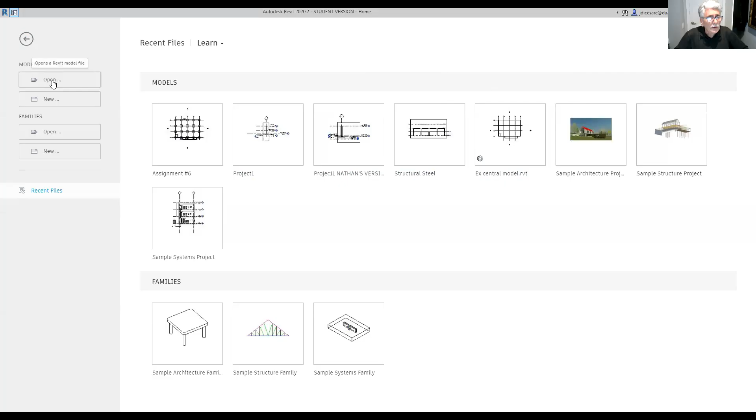Structural, okay. I'm gonna very quickly, okay, so let me just go and put this here.

Units, change this to. There we go. Okay, an eighth of an inch. That's good, that's good, that's good.

And we were at, excuse me, we're at the north elevation. And this is where we're at. And of course, we had changed this to 102. And we had changed this to 91 feet, was it 91 feet 4 inches?

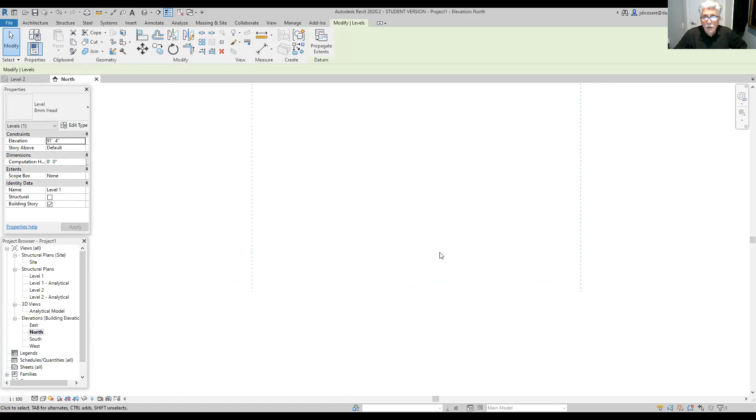I think we're pretty well back where we started. Is that okay with everybody? Yep. Oh, here, I made a mistake here. I'm gonna just change this back to 102.

Sorry, sir, could you do one more time with the grid function so I can review it? I'm sorry, can you repeat that? Could you do one more time with the grid function? The grid or the level? The grid, we haven't done anything with the grid. Are you talking about the working grid? Yeah. I'll come back to that, okay? I'll come back to that, but right now, when we go back to a plan view, I'll show you how to do the grid again, okay?

But right now I just wanna, now guys, like I said, remember what we talked about here. Excuse me, sir, pardon? Do we need to change the scale at the bottom? Well, oh yeah, didn't I change it? But I think we need to change for like every.

Oh yeah, for every view, I should have explained this, okay? For every view, okay? Now if all of a sudden you're gonna take this view and drag it onto your sheet and make a drawing with it, you understand? If you know at what scale you're gonna make that view on your paper, then you adjust the scale of this view right now, so you don't accidentally forget to change the scale of your view, you understand?

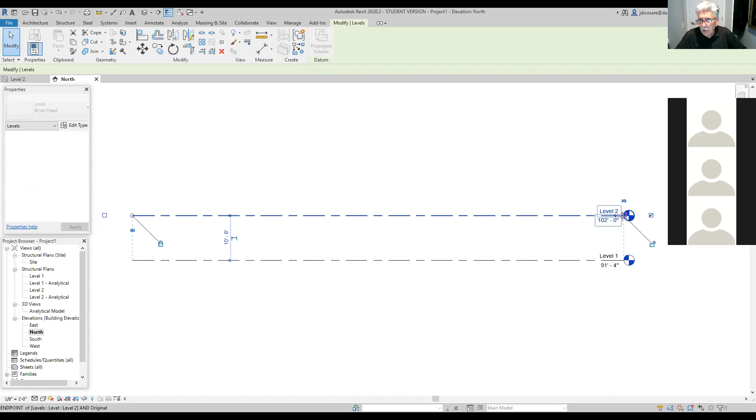I want to just move the top one without moving the bottom one, I could unlock it, and then it will only move the top one. So that's what the lock does. So anything that's lined up will be locked together, and therefore you can move them simultaneously all together. If ever you want to move only one thing, you simply unlock it and you can move that one by itself, okay?

Now, because these things are no longer aligned, you don't see the lock anymore. If I want to bring this back and line it up, now these two become locked again. I can do the same thing on this side. If I want these two to work simultaneously, I move this one over and they become locked again. That's what the locks are. In other words, it locks any element that is interconnected or interrelated.

If you ever want to stagger this, you see this little break sign. If you click on that, it's going to stagger the symbol for you, and then you can move it wherever you want, up or over. So sometimes when you have a whole bunch of them, you want to get them out of the way. That's what that little symbol is about, it's going to stagger them. And if you don't want them staggered, you can simply put them back straight.

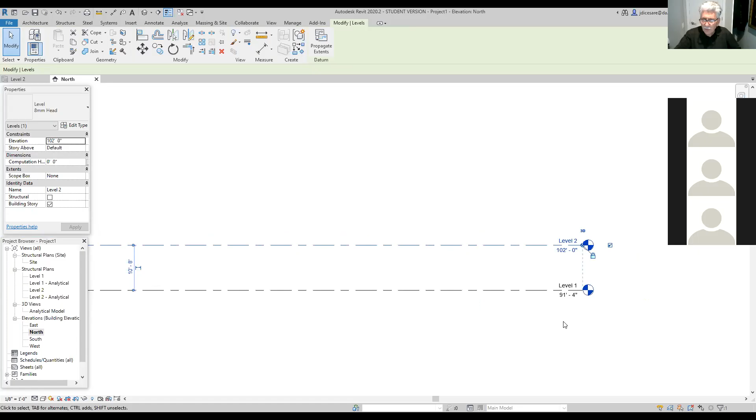Those are a number of things you can do with these. This is useful if things are getting really clustered and you want to move them over, because they tend to overlap one on top of the other, so you can actually move them around.

Okay, so now I've got two levels. Now what I'd like to do is create another level. I want to create, for example, the lowest level of the foundations. If I look at my drawing, the lowest level of foundations would be at 88.33, in other words, 3 feet below level. Before I move on, let me explain something before we create the level.

The other thing I like to do, you notice if you look at the view browser, you have level one analytical, which is for structural analysis. We're never going to touch that. Level two analytical is also for structural analysis. Now I don't want to have to remember that level 2 is 102, level 1 is 91 feet 4 inches.

So what I can do is click on this and change the name. Here I'm going to call it level 102 feet, so I know. Once I click on this, the program asks, would you like to rename the corresponding views? In other words, do you want the name changed in the view browser. Of course you do, so you say yes. Now if you look at the view browser, that's no longer level 2, now it's level 102. So when I'm looking at the view browser and want to go to that level, I know exactly which one to pick to get to level 102.

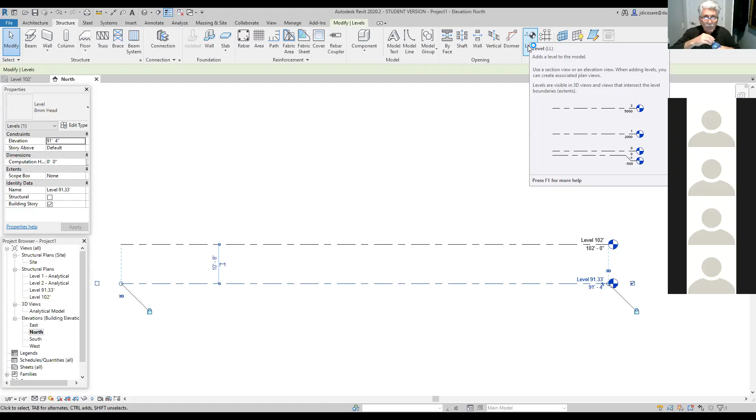Now I'm going to click on that level, and hover over the end point. I'm going to drag down, and I know that level is 3 feet below. So I can either drag down to 3 feet on the screen like this, or at one point I can simply type 3, push enter, and it automatically puts it at 3 feet. So it's up to you how you want to do it.

Then I'm going to drag over to the right and put it there. That's going to represent the top of the foundation of the lowest level. Now I'm going to press escape to get out of the command, pressing it twice.

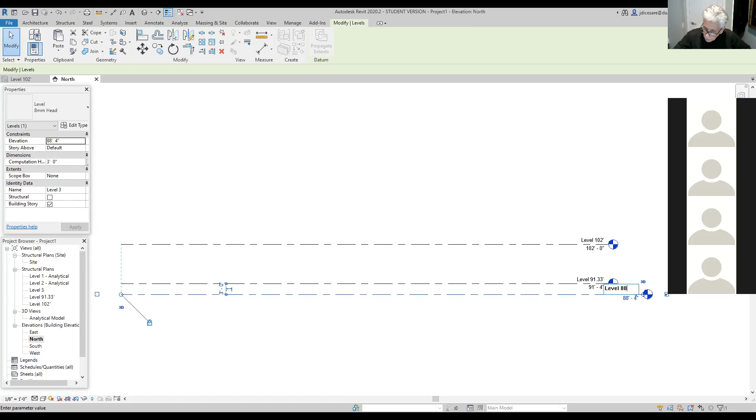I'm going to click on this and rename it. I'll call it level 88.33, and I wanted the name to also change in the view browser. So now I've got 88.33, 91.33, and 102. Now I'm going to create just 2 more levels for now, and I think that will be sufficient for the whole project.

I'd like to sometimes create a level at the deepest point of my model, the underside of the footing. The deepest underside of the footing is under footing F5 at the intersection of column 1D. If I look at that, it's at level 86 feet 10 inches. I've already done the math for you.

So now I'm going to go back to the structures tab and create another level. I'm going to go down from footing F5 by 1 foot 6 inches - 1.5, enter - and see, that's 86 feet 10 inches, exactly where I want to be. I'm going to place it here.

Now what I'm going to do is move it a little bit, just to clear it up so it doesn't interfere with that one. Now I'm going to rename this to level 86.10 inches, 0.83.

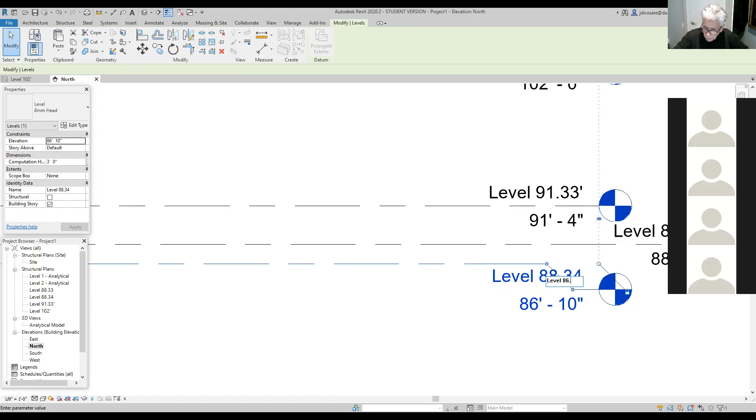Yes, I want it to correspond. So that's going to be the lowest I'm going to go on my level, the lowest where the concrete is going to be.

Now, we don't have this right now, but on the last project we'll be doing, we're going to build a steel structure on top of the floor, and we're going to put that at level 114, the floor. So we can either do it now or wait until the last assignment, but we might as well do it now so we have all the levels created.

So I'm going to go back to structures and create another level. I'm going to drag up, and that's going to be 12 feet above the ground floor, so I can put the value 12. Press enter, so it automatically snaps to 12, and that should be level 114. I'm going to change the name to level 114 feet.

So now I've basically created most of the levels I'll need to make my model. This is where I'm going to start giving the information in terms of how high each element is going to be in my model. Does anybody have any questions so far?

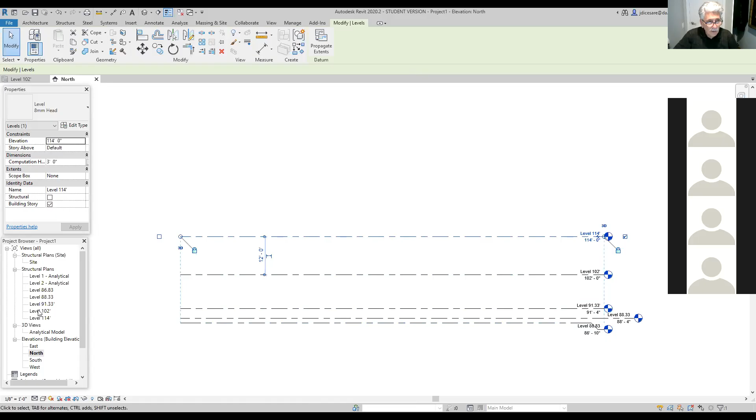Now what I'm going to do is go back to a plan view, and I'm going to look at the view of level 102, because I'm not going to be working on 114 right now. So if I go to my project browser and double click on level 102, it brings me back to the plan view. Everybody sees that? So the project browser will instantly bring you to the views that you want to go to.

Thank you. Now, Jimmy, you were talking to me about the working grid, right? Yes, sir. So first of all, are you on the structures tab? Yep. You are on the structures tab. If you go all the way to the right, you see where it says set? Right next to it, there's something called show. Okay, I found it. It's in a smaller icon.

Well, Jimmy, that's why - now you're going to have to put up with the fact that we don't have the same version, you understand? And this is what pops up. So leave it on for now, okay?

So guys, everybody turn on your grid. This is the working grid, it's got nothing to do with... Now that we've got our levels, so that we can place things and define the height of things, what we're going to be doing is making the grid of our plan view so that we can start placing the horizontal elements. So we're going to start creating a grid. Does everybody have their grid on, okay?

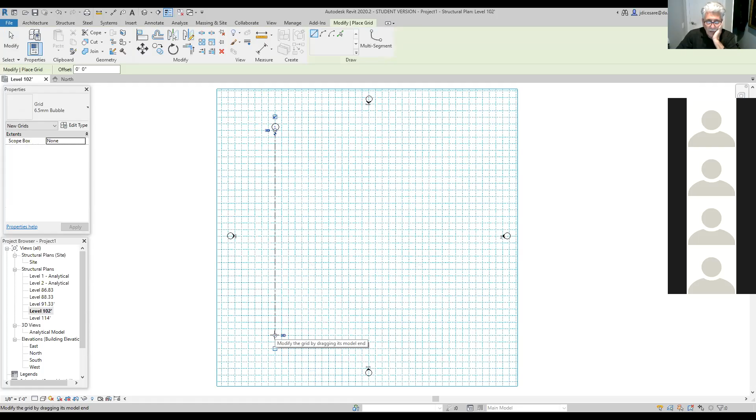Now I want to create a second grid. So what I'm going to do is hover over the bottom of the first grid and drag it over, and you'll notice that I'm starting to have some dimensions showing. Now, because my grid is at 4 feet, I cannot snap to 25 feet, because the next grid line is at 25 feet. So I'm simply going to put in the value of 25. Now the program snapped to 25 feet away.

I go up, and of course, I line myself up with the first one. I see that I'm lined up, I'm vertical, 90 degrees, click. Now, the nice thing about Revit versus AutoCAD, you'll notice that becomes grid number 2, so I don't have to go change that, okay?

Now, if I go back, I hover over the bottom and drag over again, now another 25 feet, so I will be putting 25... oops.

25, enter. I drag up, line myself up, and I've got grid number 3.

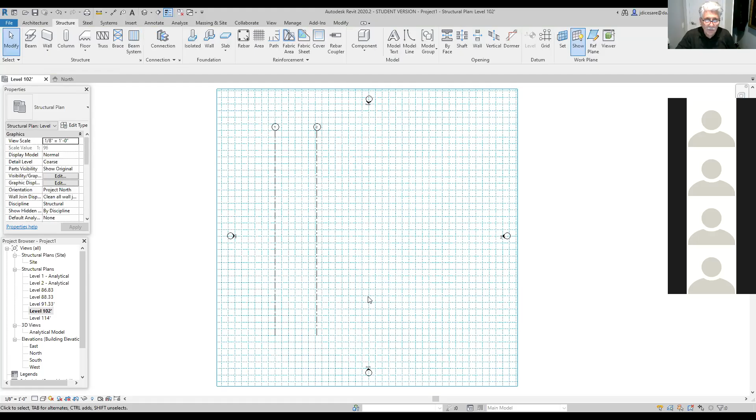Oh, sorry, I made a mistake. Grid number 2 was at 24 feet, right? So let me just change that to 24. No, it's actually 25, sir. No, between grid 1 and grid 2 is 24 feet. Oh yeah, right, I'm sorry, I made a mistake. So 24, enter. Now I'm at 24, okay? That's what I like, I'm showing you how fast it is to correct a mistake. Then I'm gonna go back to structures now, so I apologize about that.

Go back to grid, go back to that command. Now this one's at 25. I'm gonna put 25, enter, go up, line it up so everything's nicely lined up, click, go back down, go over. I'm gonna let you guys have a chance to do this.

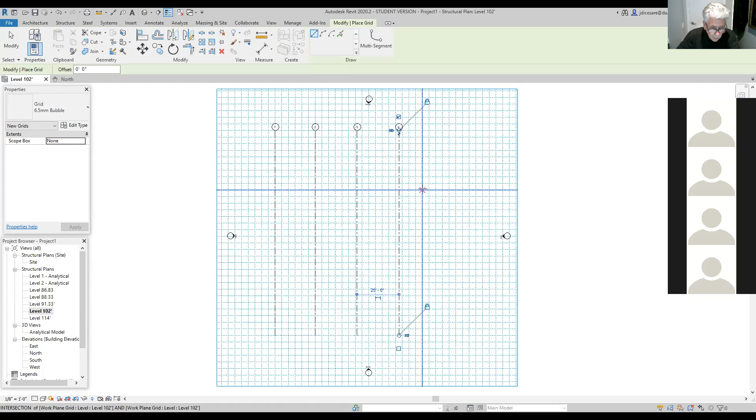25, again, go up. And of course one last one, which would be at 24. And of course, go back up.

Okay, so far so good. I'm gonna give you guys a chance to do this, so take your time. Like I said, I made a mistake right at the offset, but I was able to correct it right away, okay? So you should have between 1 and 2 at 24 feet, 2 and 3 at 25 feet, 3 and 4 at 25, and then 24 feet. Give me some indication if you guys need more time to do this, because remember, the grid that you're creating is very, very important. Why? Because everything is going to be referenced with respect to the grid.

Is everybody okay with this, or do you want me to do it over?

Sir, yes, I don't know why but my grid function doesn't work. Your what? The grid? Yeah, the grid. Are you talking about the grid that we're trying to create? Yeah. In other words, are you on the structures tab here? Yes. Okay, and you have the icon here, grid. Yep. And when you click on it, do you get where you can start your grid from? I didn't see my grid. What do you mean you don't see the grid? You're talking about the working plane grid or your grid? The working plane grid. Well, that's because you zoomed in too closely, you have to zoom out.

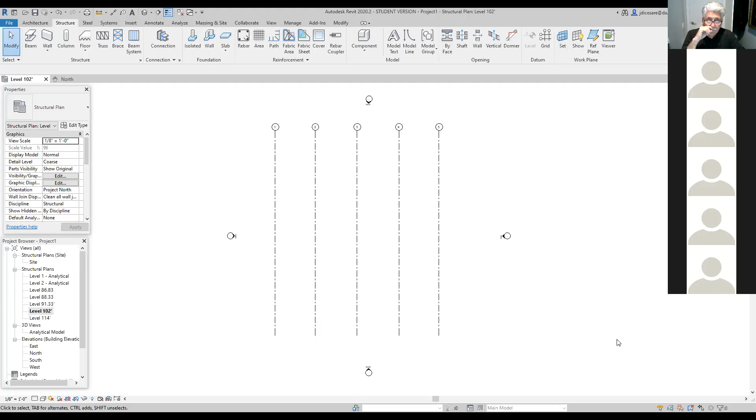Now, Jimmy, let us know when you're finished so that we can continue, okay? Okay, you're good?

Yeah, I'm setting the third line. The fifth one? No, the third one. Okay, so keep going. You only have to do the third one, then do the fourth one, then do the fifth one.

Okay, now guys, like I said, you notice I made a mistake at the very beginning. I put 25 feet between 1 and 2. What I like to do is make sure that I'm on the right track, everything is where I want it.

If you look at the top ribbon, the top menu, this is what they call the quick access menu. You have measure between references. So if I click on that, I could measure between that line and that line. I have 24 feet. I can measure between this line and this line, so that's good. I have 25 feet, so I'm just double checking to make sure I didn't accidentally put in the wrong value. And now, ultimately, if I want to check from this line to this line, I should have 98 feet. Everything is good, so I'm happy with the distances, okay?

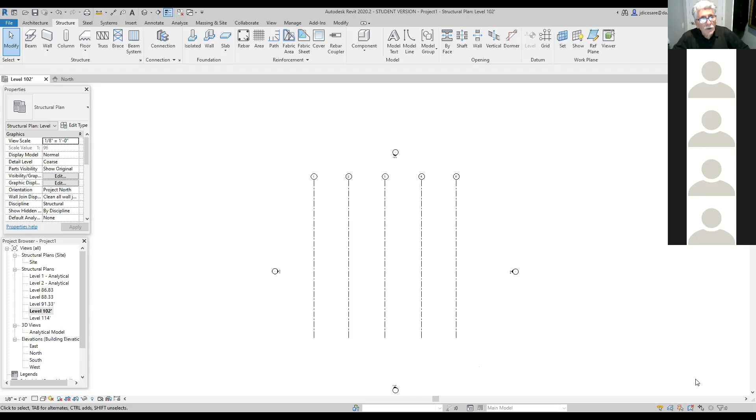No? Okay, so now again, make sure you're on the Structures tab. Make sure you click on Grid. Now pick a point wherever you want, okay? Just leave yourself some room - you can move these anytime, but if you look at your drawing, you're going to have to make room to put that little bubble and your dimension. So be reasonable where you want to do it, but you can always move this at any time. You pick a point, drag it over, make sure you're at 90 degrees. Okay, I'm horizontal. There you go.

Now, before you - what I want to explain, guys, if ever you want to get out of a command with Revit, you have to hit the escape button twice. Escape gets you out of the command, escape gets you partially out of the command.

Now I want people to zoom in here, okay? Now you notice that it put grid line number 6. You don't want a 6 there, you want an A. So you click on the 6 and change that to an A - in other words, double click on the 6 and change it to an A. Click outside the box. Now that 6 has become an A.

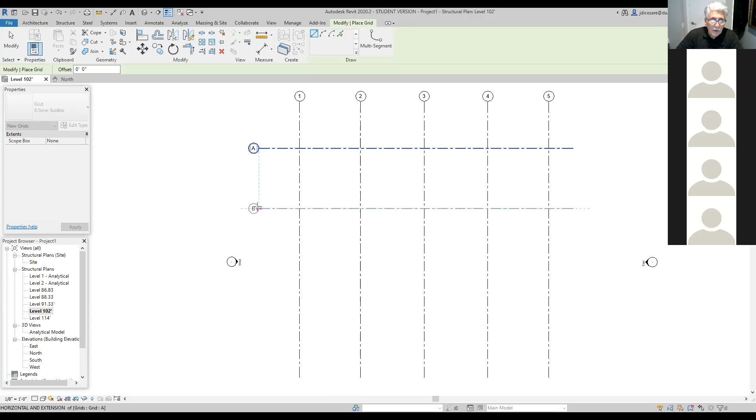Now I'm going to zoom out again, zoom out to about here, and move up this way. Now what's nice about Revit is that once I've changed that to an A and I'm ready to create my next grid line, I go to grid, hover over this point, go down to 24 feet, move over, and look what Revit does automatically - it changes the grid line to a B. Isn't that nice? Then, if I go back here, hover over this point, drag down another 24 feet, and drag over, it becomes a C. So that's what's nice about changing that right away - this way I won't have to go back and edit the 6, 7, 8, 9 to A, B, C, and D.

And last but not least, one more time, drag down - like I like to put the value so I don't have to worry about being precise. 24, enter, and now I've got my D, okay? So now I've created my grid, and of course I should go back and check.

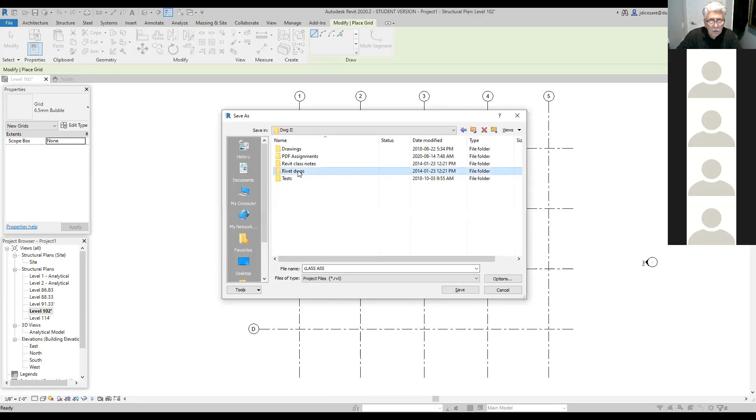Okay, so I saved this, so that if we ever come back, I'll be able to pick up from where we left off. Like I said, before I move on, I always like to double check to make sure I haven't made a mistake.

Now I like to go back and check my dimensions. So I'm going to check from here to here. I have 72 feet, so far so good. And of course I should have 24 feet in between. So there's 24, everything checks out.

So guys, do yourself that favor, always double check to make sure everything's correct, because the computer uses all this information to do its calculations. If something is off, you can ask yourself, why isn't it working? Well, because the reference the computer is using is not exactly what you think it is. So always double check that.

Okay, now there's a few things I want to talk about with grid lines. Just like we did with the working grid, I want everybody to click on and highlight grid line number 1. Now look at the properties palette. Right now this is a grid with a 6.5 millimeter bubble.

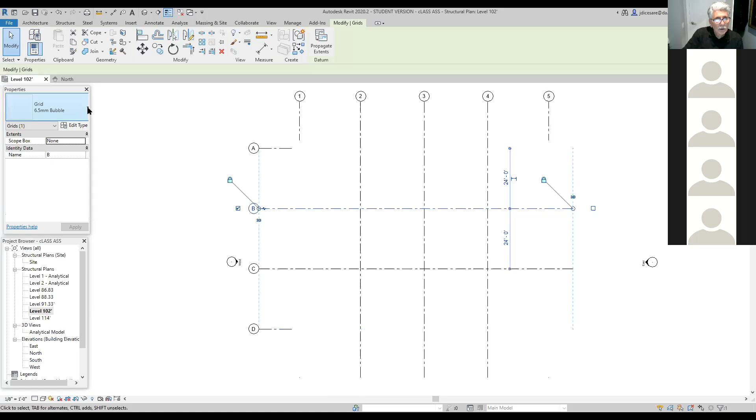Now, underneath here, you don't see it, but there's a little triangle that you can fly out the drop-down menu. So when you drop down the menu, we select bubble gap. You start with bubble with a gap, you understand?

Now these are your drag points here, see the blue one? So I'm going to drag it, and it even tracks it for me if I'm in line. If I want to keep it in line with that one, and if I want to get rid of the line completely... I'm going to leave that there for now. So if I leave that point there and press OK, enter, look, it created a gap between those two drag points. That's what it does.

Now, since I don't want to see it on this side, I simply drag it into that point, and it's going to end up like you see here. That's the point of the grid line right there, and there's one right there, but this is so small that when you're plotting, you won't even see it. So is that okay? Do you feel comfortable now with it? Okay, now I understand.

Okay, so now I'm going to undo this because I don't want that to be there. So now let's go back and everybody hit north elevation. You see, there's your grids. Now, of course, because I created a gap here, it's also a gap here, but you have your grid lines shown in the elevation.

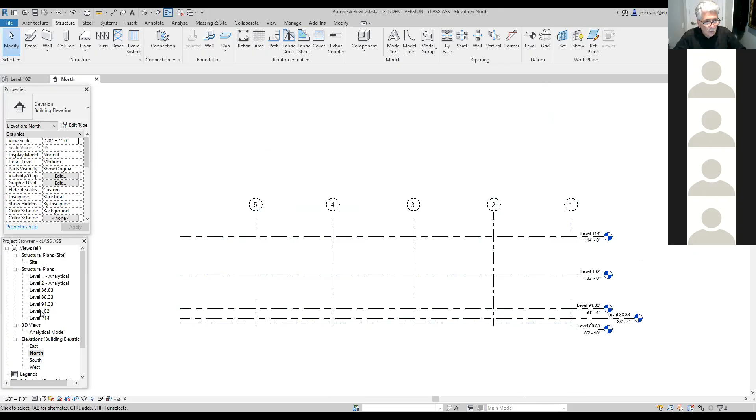So go back to level 102. Now we've basically set up our grid and we're ready to start modeling. So what we're going to do is start putting in the wall. In other words, we're going to start by putting the general wall in and then we'll work out the other smaller walls. So basically, we want to put in the overall wall here.

So guys, with Revit, remember, information is what you need to put in the wall, and if you don't put in the correct information, you will never get the wall put in correctly. So what you need to know is: the wall starts at what level? It goes down to what level? How do you want the wall to be placed? And so on. What type of wall do you want placed?

So let's just start. First of all, the category we're working with is walls, so everybody's under the category walls here, right? So open up wall, and of course we're going to be putting in a structural wall. Right now these are all the structural wall families, the type of walls that I have already built into Revit. Now I'm going to use a concrete foundation wall here.

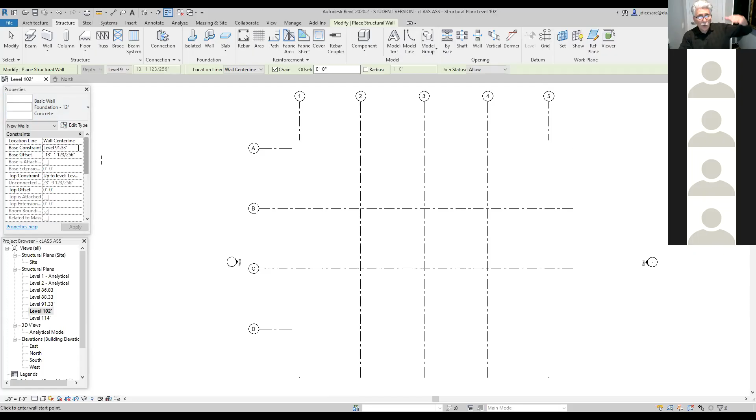Now, how far down do I want the wall to go? Well, I know I want that wall to go to level 91 feet 4 inches. So I want the bottom constraint to go down to 91.33. So now I'm telling the program, take this level and go down to this level. That's the information it needs.

As far as offset goes, I don't have to offset from these levels. That's exactly where I want to go. Therefore, this should be 0.

So far, what I've done is told the program where I'm placing this vertically in my model. I'm placing the top at level 102, and the bottom at level 91.33. That's where I want it to be, and that's the height of my wall. So that's what the program's going to use to do its calculations.

Now, how do I want to place a wall? There's a number of ways that the wall can be placed. And here is the wall location. You can do it from here.

So you can place it with the wall center line. In other words, if you want the wall to be centered where you're placing it, half on one side, half on the other side, that's center line. Then there's finish face exterior, finish face interior. Then there's core face exterior, core face, because some walls are made up of two or more compositions, so it gives you that option.

Now, if you look at the drawing, you notice that the inside face of your wall corresponds to your grid. So you want the program to place the wall with the finished interior face. So what you would pick is finished face interior. Now, don't worry if you made a mistake, I'll show you how to correct that. So now you're almost ready. Location is finished face interior.

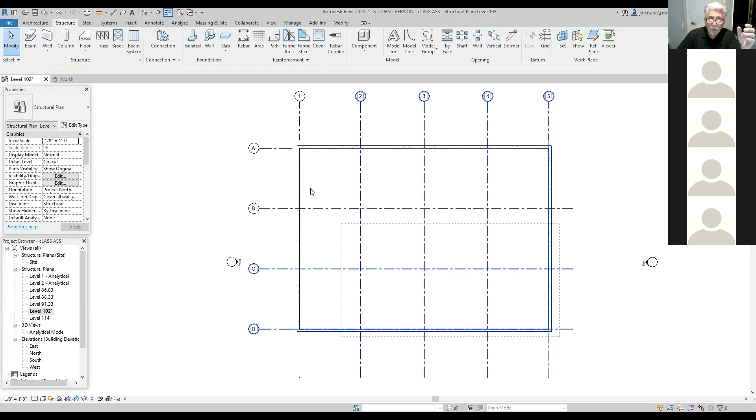And then if I want, I can also pick by crossing. Crossing is from right to left. So I'll draw exactly the same rectangle, but the difference is that with crossing, everything gets picked. So you do the same thing with Revit. You can, and then if you want to pick one or two elements, you pick one element, you hold down the control button, you pick another element.

You hold down the control button, and you can keep adding by holding down the control key. Then if all of a sudden you want to remove one of them because you picked it by accident, you hold down the shift key and go back, and the shift key will remove what you've picked. So control adds, shift removes. Can you remember that?

And like I said, if you want to pick with a window, you draw a window, whatever's in the window, it picks it. If you want to draw a crossing, whatever's in the crossing, it picks it. So crossing means anything that crosses that rectangle will get picked. Window means only anything completely within the window will get picked. That's how AutoCAD works also, since they're both developed by the same company, Autodesk, and that's why they work that way.

Okay Jimmy, to go back, I'm going to pick this and delete it. So I'm going to go back to wall, structural wall, 12 inches. There's my base constraint 91. That's okay, finish face, so all my properties stay the same because it keeps the last values by default in its memory. Then Jimmy, you come up here, you see where your drawing tools are?

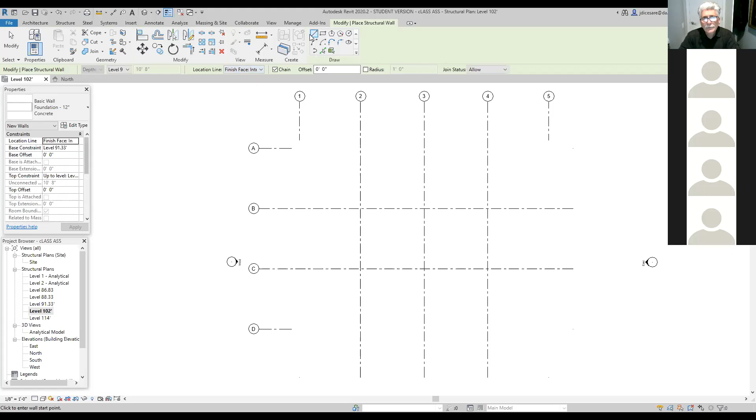Pick the one that has a rectangle. Then go find the intersection of your two axes. You see there? Pick a point, then drag out, and go to the other corner and find the intersection of the other two axes. Once you pick the two points, Revit draws the wall for you. You press escape and you're done.

Now guys, what I'm going to do at this point is, what's nice about Revit, you see at the top here the little house? Everybody sees that, where I'm pointing at? Click on that button, and you can automatically see your model in 3D. There's your model in 3D. Of course, there's not much here because we just started to create it, but that's your model in 3D.

Now, I gotta get rid of this here, sorry, I gotta move this over, okay? Now here you have your cube that you can rotate your model on a particular view. So if you click on the cube here, it turns it around for you. You can start seeing different views of it, okay? You want to see it at the bottom, you want to see it at the top. So that's the cube, that's the view cube.

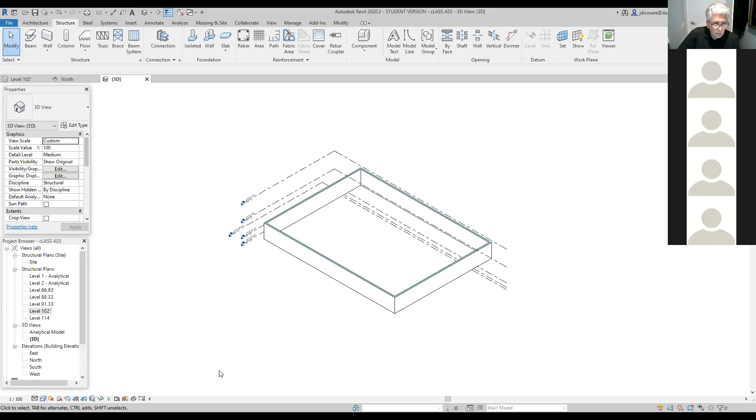Now, this is right now showing to you in wireframe. If you want to change that, go down to the bottom here where it says visual style, okay? You click on that and you can have it shaded. You can see it shaded. If you want to have it realistic, you can have it realistic. If you want to see it as consistent colors, you can have it like that. And if you want to see it as hidden lines, you can have it like that. So that's the number of choices you have. It's up to you how you like to see your model, you can have it as shaded.

Now let me just put this back here. I have a question. Yes, you may. I don't know why, but my wall says that it's 73 in height when it should be 74. And I looked at the spacing in between my A, B, C, D, and it's 24 feet, so I don't know why I wrote it wrong. Your wall is 73 instead of 74? Yeah.

Okay Emmanuel, what we're gonna do is, well, you're gonna have to share your screen with me and I have to look at it, you understand? But you're telling me, okay, so let me go back to elevation 102, okay? Oh, one last thing, okay?

If ever, it's up to you guys, if you ever want to see your 3D and all your other views at the same time, like close this one here, you don't want to see the north elevation, okay? If you ever want to see these all at the same time, make sure up here you only have these two views open. If you go to view, and here you have tile views, you can see them both simultaneously at the same time, see?

You can tile both views and have as many tiles as you want, the more views. That's how you can view everything at the same time. I don't like to work that way, but some people do, so this way they automatically see what's happening in 3D. And of course, if you don't want to see it in tile view, you just click back.

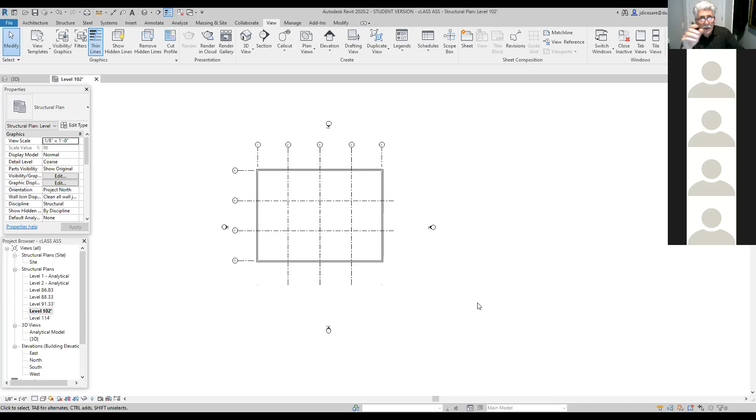But now let's just, Emmanuel, you're telling me that when you're coming here and measuring from this endpoint to that endpoint, you don't have 74 feet. Is that it? Yeah, I don't know where I went wrong.

So basically, well, it's finish face in, right, for the wall? Yeah, but okay, now let me show you something. Does the inside finish face here correspond to your axis on all four sides?

Hold on, I deleted my entire wall, so I'm gonna just... Oh, you shouldn't have done that, I could have shown you how to modify it. Okay, I'm sorry, I was just like, okay. I'm glad you did, it's good practice. Don't get me wrong.

Now, guys, let's say you had automatically picked exterior wall, I'm going to show you something. Of course, what Revit would have done, it would have done the exterior wall along here and put everything on the inside. Now, the simple way of correcting it, if I click on the wall, you see these little arrows here? These arrows will flip the wall. So if I click here, that wall is going to go from inside to the other side. So if you accidentally did it the other way, you can just flip the walls over.

So therefore, you just flip here, and now it goes back to where it is. So if you had accidentally forgotten about that property in the properties palette, and you already drew it, well, you just flip the walls, okay? And each wall has that feature, so you can flip the walls anytime.

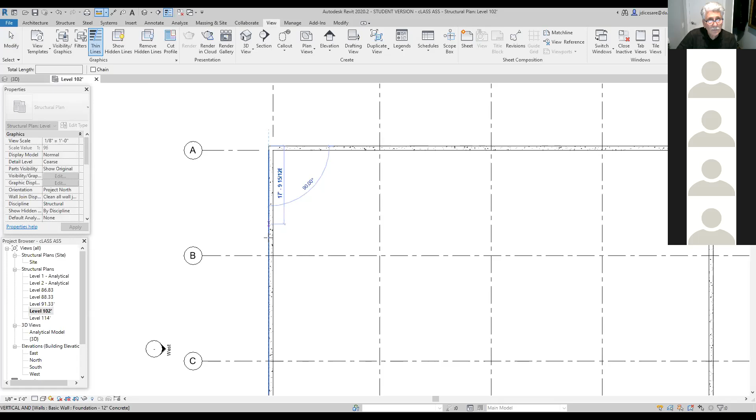So now I see 101. Do you have 101? No, if I do dimension from this endpoint - oh, you mean this way? Yeah, well that one I have 101 and the other one I have 74. I have exactly 100 feet. Okay, so I must have messed up somewhere.

Now look, Emmanuel, just check to make sure that the spacing of your grid lines are right - in other words, 24, 25, 25, 24. That's the first thing you should check. Okay, yeah, I messed up somewhere, the first one I put 25 instead of 24. Which one? The one in between 1 and 2. Okay, so that's where you put 25. It was my initial mistake, and I forgot to tell you to correct it, okay?

Yeah, so basically my outside wall, like on the left hand side, is off by 1.

Do I have to redo the entire thing or can I just move it? Well, there's a number of things I could show you to do, but right now I think the best thing to do is fix your grid, because that's going to be affecting everything else you're going to be doing with your model.

So in other words, right now you have 25 feet here, 25 feet here, and 24 feet here. Is that what you're saying? Yeah, so then I just changed the measurement.

No, do this, listen to me. Right now you're telling me you got 25 between this one and this one? Then 25 here, 25 here, 25 here, but 24 on the last one. So in other words, what you want to do is shift everything over by a foot.

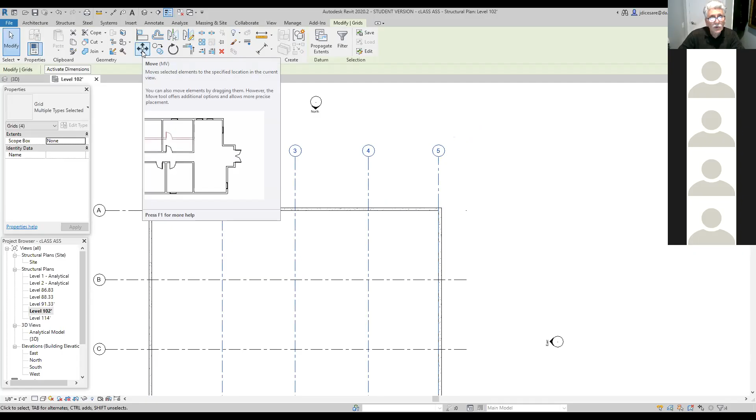Then you see here where I'm pointing, that's the move command, just like in AutoCAD. So say move, okay? Just pick a point anywhere, pick here, anywhere, okay? Pick that one, show the direction, and just put 1 foot, enter.

Oh, I shouldn't have done it to mine, but that's okay. Don't worry, I know how to correct myself very quickly. Yeah, so I did that, but then the exterior wall on the right side is off. But don't worry, now you can redraw your wall very quickly, because the grid is correct. Understand? Yeah, I'm just going to delete it.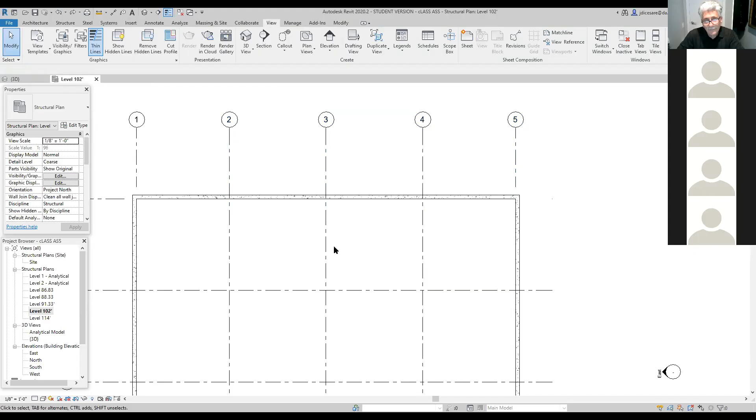Because everything in your properties palette should not have changed. It keeps everything you put in there for the last type you modeled. Understand? Yeah, let me make sure everything's good. Now, you see how fast I'm going to correct mine? I'm just going to undo. Yeah, it's a bit faster than me.

Okay, so that's where your problem was. That's why it's very important, like I said, the first thing I do is when I put my grid, I religiously check the dimension between each grid line, the overall dimension, because everything is going to get referenced with respect to this grid. There, that's very good.

It's all good now. Okay, so now, did you go see your wall in 3D? Does it look good? I didn't. Anyway, we'll be going back and forth to 3D, don't worry about it.

Okay, so guys, was that nice? Easy to do? Is everybody okay with that? Who hasn't been able to put in the wall correctly? Don't be shy, guys, now's the time to say it. Me, sir, you weren't able to put in the wall.

Well, it says the wall highlighted is overlap. You have 2 walls that you drew accidentally? I don't know. So delete everything and start over. Because you might have drawn it twice, and all of a sudden you're overlapping two walls in your model that you can't see. You understand?

So delete, like, do this, Jimmy. Make a window, start from here. Make a window like this, okay? Make sure you make a window around the whole thing except your grid, and then hit delete up here, or hit the delete button. It's going to erase everything, so if you accidentally put two walls, it's going to erase both of them. And then once you've done that, go back and redraw your wall.

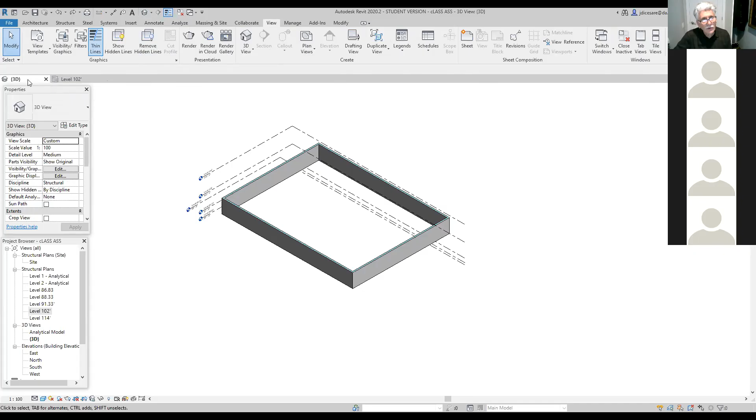Now, if you'll notice, once you pick 3D, Emmanuel, if you look here along this line, all the views that you open are all going to be there. So then you can just click there and it'll automatically bring you to your 3D. Click there, brings you back to my 102.

That's the thing about Revit, they give you too many options and it's only confusing. Well, this is good because this opens up all the different tiles when you want to see multiple views at the same time, and it tells you how many views you're going to have. So that's why they do this here, okay?

Okay, so break time. How long of a break do you guys want? Nobody wants a break? I'm getting no answers, guys. So I don't know, sir.

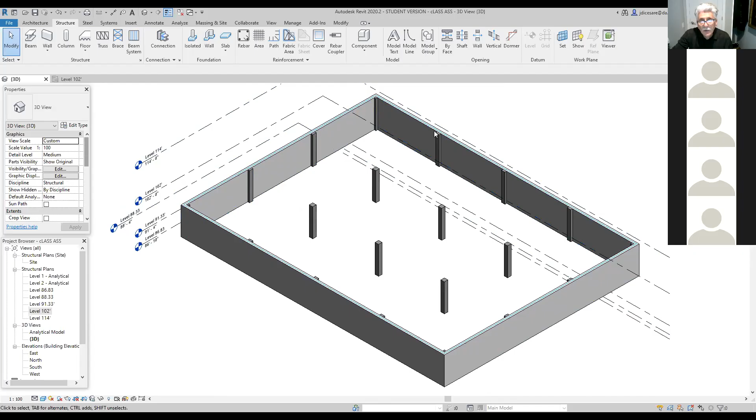Now guys, I want you to appreciate, when you were looking at these drawings and doing the AutoCAD, these columns are partly embedded in the wall. That's why you only see that little part sticking out in the drawing, because that's exactly how it's supposed to be. So what I like about Revit, you see in 3D what the 2D graphic image was trying to show you. Here in the little corner, I only see a little corner sticking out in the graphics view.

That's because this column is mostly embedded in the wall. Here, half of it is embedded. Here, three-quarters of it is embedded in the wall. Here, half of it is embedded in the wall. So this is what you would actually see once this wall would be built according to the information you showed on your drawings. Okay, so now I'm going to go back to 102.

Could you do one more time how you do the column 16 by 16? Yeah, did you go to columns? Go to the family columns. Go down here, pick a concrete, any concrete column here. I can't do it again because I don't want to create. So pick any one here. Which one do you have, Jimmy?

There's only one option I can choose. It says W-shaped column. No, it can't be. You got to have concrete columns. You don't have any concrete columns? No, because look, these are W-shaped columns here. You don't have rectangular concrete columns? No, there's nothing there. You don't have anything there. There's only one type, it's W-shaped column. You only have W-shaped columns.

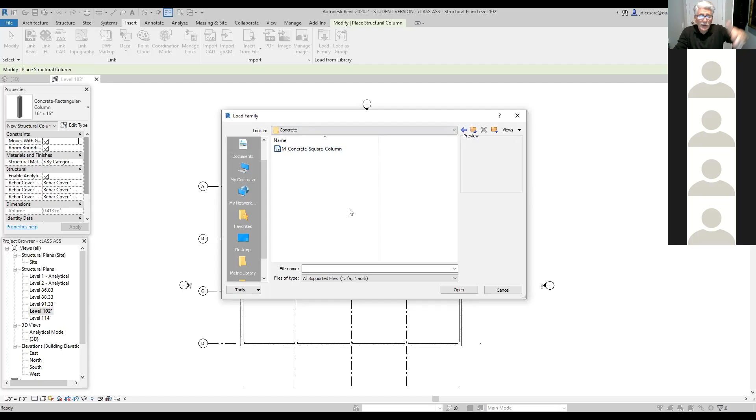I will show you in one or two classes how to download families from Autodesk, but that's not part of today's lecture. Understand? Okay, under generic, what do you have in terms of type?

You only have steel columns, you don't have concrete columns. No, it's only W-shaped columns. Only W-shaped columns, so you have no concrete columns. No, not at all. So since you don't have that family in your library, you won't be able to put it into your model. You have to now download that family into your library.

And then from your library, you have to download it into this file. That's all what I was doing for you, understand?

See here, I have concrete square columns. I can download this one, you understand? And then I have that now in my program, but you don't have it in your library, so it's hard for me to tell you where to go get it. So the families have to be in your library so that you can take it from the library and put it into your drawing file.

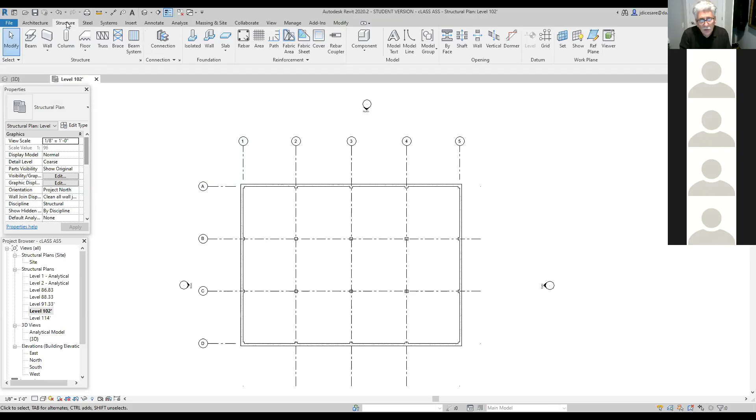So if you don't have a family library of those families, I can't do anything, Jimmy. I'm sorry. So a family, you're gonna follow the lecture, you're gonna have the video, and once you're able to download the family, you'll be able to continue with your model. Understand?

Sorry about that, guys. Like I said, there's all kinds of glitches, but some of them I can resolve, but some of them, you know. Okay, so now we've put in the columns, we've put in the walls.

Now we want to start putting in some foundations, okay? So let's start by putting in the footing underneath the wall, okay? So can anybody tell me, before you go and worry about putting the footing, the most important thing is the information. What is the size of the footing that we want to put underneath the wall? Can anybody tell me?

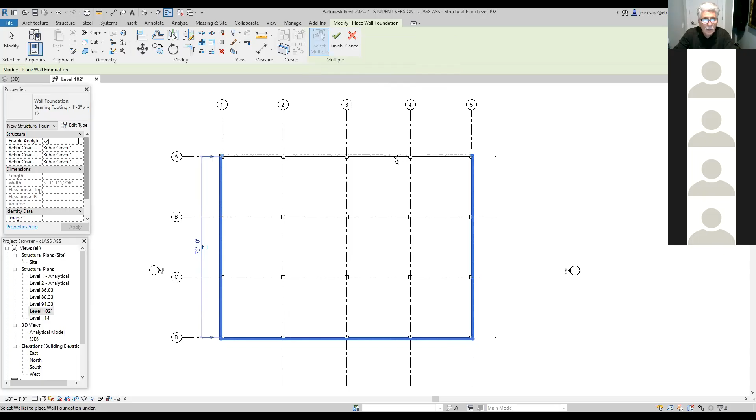Okay, so now if that's the case, pick one. In other words, tell the program you're going to select multiple walls. So you pick one, pick another one, pick another one, pick another one. For some reason, it doesn't want to pick that one.

Okay, so here all of a sudden it says all this stuff. For example, if I now look at my 3D view, I see that I've got a footing. I got two footings here and I made a mistake, so I'm gonna have to go and correct that. I see my footing here in 3D, it's in my model. The only thing is that the view range of this view is not correctly adjusted. Now I'm gonna show you how to adjust that if you wanna see this thing.

So basically, I'm gonna go back to 102. So I don't see nothing here because the element is outside the view range. Now I'm going to explain very quickly what view range is, and then you guys will have an idea of this. If I go back to level 102 now...

And if I go to the properties palette here, this is the view range. Now I'm going to click on the view range, and this tells me what the view range is. If you want to know what view range is, learn more - this tells you, depending on the settings, where the upper view is, the bottom one, the cut line, where it cuts the line. This is the view range to the bottom. So this explains to you what view range is all about.

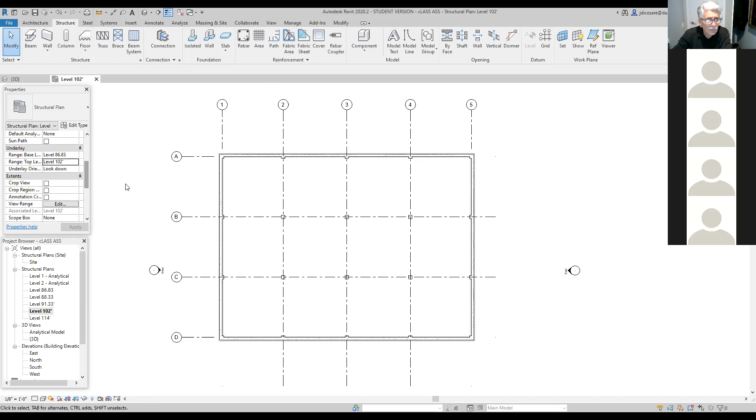And then it all depends whether I want to look down or whether I want to look up. Do I want the program to project everything downwards or upwards? That makes no difference at this point. I'm going to say looking down. Fair enough? Once I've done that, you notice now I can start seeing, now it's grayed out here.

Well, I go to the... excuse me, I go to the manage tab. I go to additional settings. Here where it says underlay halftones, and I just say do not apply the halftone. That's it. And now I see the lines no longer in halftones.

Okay, so there you go, guys. Like I tell you, this program has a lot of information, and it has a lot of areas where you have to go either toggle something on, toggle something off, and it takes a while to get to know it.

So now - excuse me, sir, yes, what did you click? In other words, first of all, did you adjust your underlays? No, the halftone, I'm on the halftone/underlay tab. In other words, you got to go to level 102, you got to go in the properties palette here.

You got to go to underlay. Go find where underlay is in the properties palette. Oh yeah, I did, yeah. And then here you put the bottom range, you go to the lowest one. Go to 102, that should be the highest one. We won't be doing anything over that.

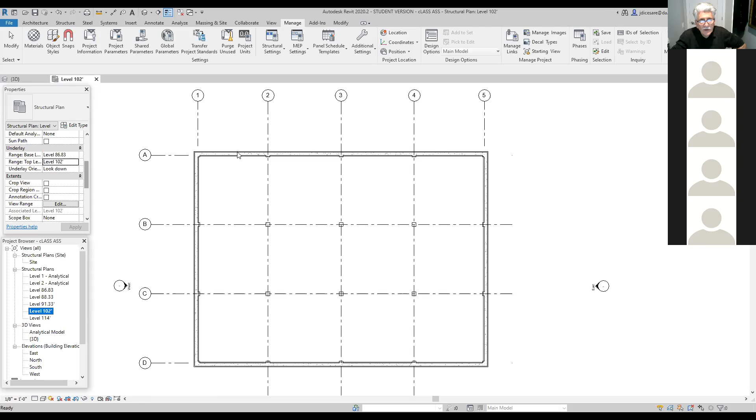Now you want to look down. Once you've done that, you should start seeing the perimeter of your footing in a gray tone. Is that what you see, or is it in the dark tone? Light, a light tone. So now if you want to adjust that as a full dark tone, you go to the Manage tab here.

Go to additional settings. Click on that, and where you see halftone here, underlay, click on that. Just remove the check mark. There you go.

Now, guys, you can also play around with the view range and adjust the view range. It's up to you, but that's a very hard thing to start playing around with. I found it's much easier to just adjust my underlay so I can see what I'm looking at. So I do suggest if you have time, go into the view range, read about it, get to know what projected lines are and what cut lines are. That's something I strongly recommend you take the time to explore on your own.

So far, so good. Now we've got the strip footing underneath the wall, which is nice. Now let's start putting the footings underneath the columns. Does everybody have a copy of the schedule for the footings of the columns? Yes or no? Yep, I do. Okay, so it's from that schedule that we'll get the information on how big to make each footing, correct? Yeah. Okay, let's start with the footing F1.

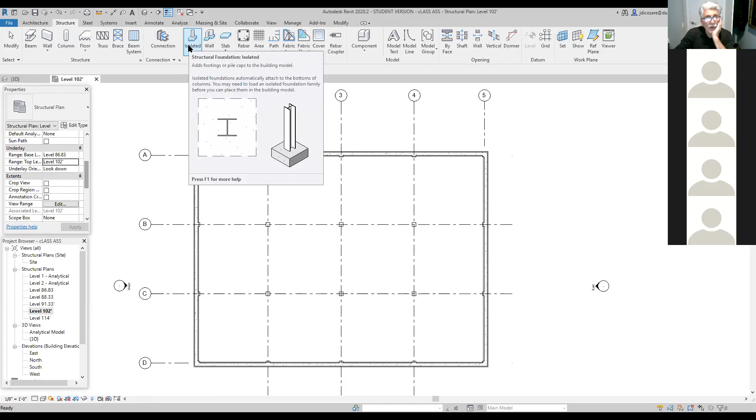So basically I'm going to go to the Structure tab. Is everybody there? Yeah. Okay, so the category, of course, would be under Foundations, right? And this is the footing that you put underneath columns, correct? An isolated footing? Yeah. Everybody okay there? So click on that—at least this is the category. Yeah, let's save the project.

Okay, now it's a rectangular footing, 1800 by 1200, in other words the length, the width, and the thickness. Is that what I want to put in my model? No. So I'm going to go create a type that I want to put in my model. I'll start with this one because it's a concrete footing, right? And I'm going to edit—if you come here, you basically have only two types, so I'll start with this one. I'm going to edit the type.

Okay, so basically I'm never going to use this, so I won't even bother saving it. If I want to save something, I'll rename it, keep that type, and create another type with it. If I don't use it, I'm just going to rename it and modify it. So in this case I'm going to rename it, right? What am I going to call this footing, guys?

F5? Pardon? F5, or F1, whichever one. Exactly, F1. Call it F1. This way, when you go tag it, it's going to put F1 right away. So you're going to call it F1. That's just a name—it's got nothing to do with the actual properties of this type.

So I press OK. So what's the foundation thickness? One foot 11 inches. Okay, so it's 1 foot 11 inches. I'm going to change this to 1 foot 11 inches.

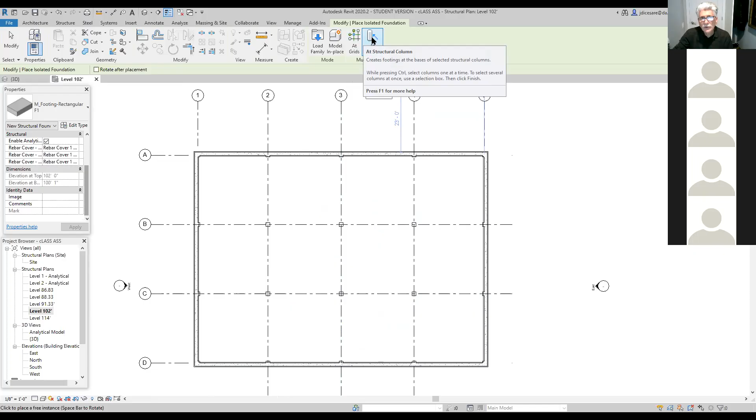And of course I'm going to pick one column here. Now I can do this fast—I can do a window like this, and it picks all the columns right away. So that's this, guys: the sooner you know how to use pick by window, pick by crossing, pick individually—or I could have picked one, held down the control button, picked the other one, picked the other one, picked the other one—I'm just showing you the faster way of doing this.

Now that's exactly where I want my footings to be. If I'm happy, I go back up to where the green check mark is, and I press check. Then it says all attached structural foundations will be moved to the bottom of the column. Of course, that's where I want them—that's exactly where I want them. Okay.

Okay, and there you go. Does everybody have those? Now, of course, if you look at the 3D view, there's all the footings underneath those columns.

I'm going to go back to 102. Now, we'll worry about this after. You see all the hatching that you have on the surface here? I'll show you how to get rid of that afterwards, okay?

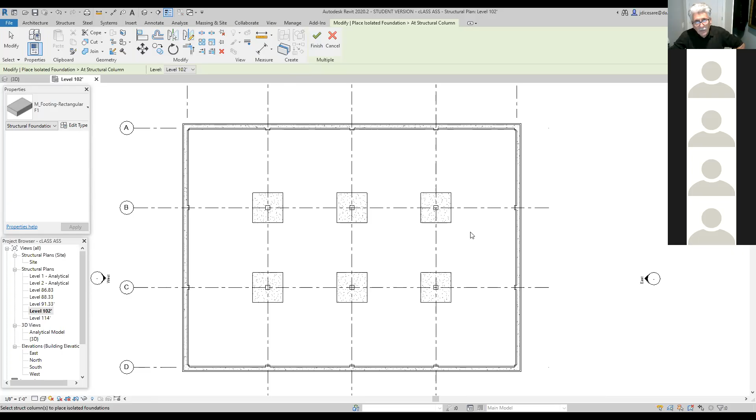I press the check mark. Okay, do you want to exit? Yes. Okay, so now I'm done. So now that command is finished. I've got all my F1s already placed in my model. Now the next one I'm going to do is F2. So I go back to foundations, go to isolated footings. Now I'm going to start with F1.

I'm going to edit the type. Now I'm going to edit it. Now I want to keep this type, so I will not rename it. I will duplicate it, not rename but duplicate, so I can keep all of that type and create another type with this information. So what will I name the other one? Well, I'm going to name it F2 because that's the one I'm going to be doing right now. I'm going to call it F2.

Now, if I look at the schedule, what's the size of F2? Eight foot by 8 foot by 1 foot and 10 inches. Okay, so the thickness is 1 foot 10 inches. I'm going to change that. And the width is 8 feet. I'm going to change that. And the length is 8 feet. I'm going to change that.

So once I've changed the dimensions, I'm ready to place it. So I press OK. And if I look at my drawing, where is F2 located? Would somebody tell me? At D3. Okay, D3, perfect. So in other words, first of all, I'm going to place it with the column here, by column. I'm going to go get the column at D3. And that's the only one I have.

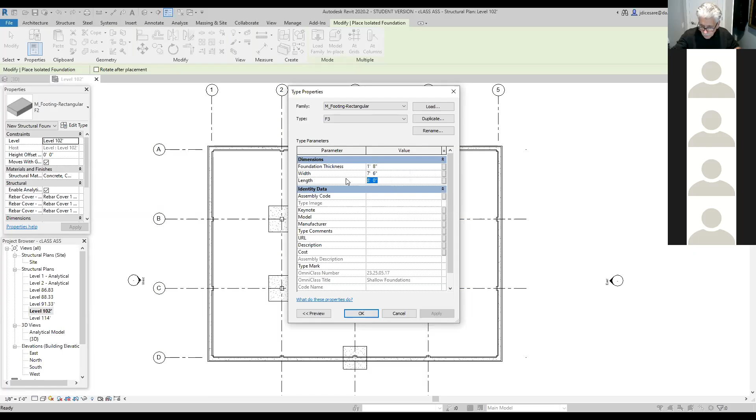F3, measures 1'8" by 7.5 feet. Add columns, so F3 is here, F3 is here, F3 is here, and F3 is there.

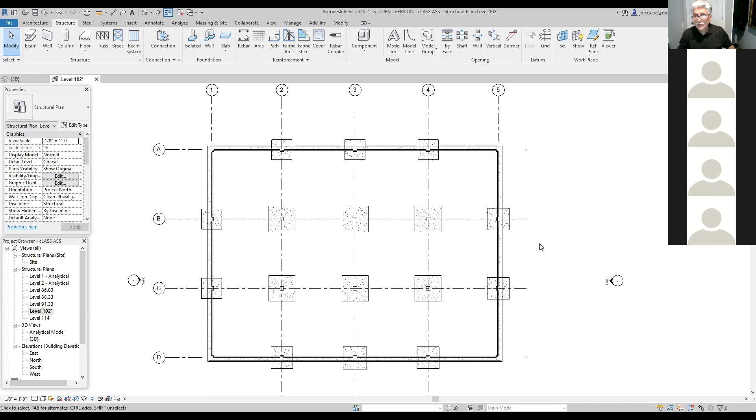Okay, so what were you asking me again, please? When I go into my 3D view, I'm seeing... Oh, the 3D view, okay, so I'll go to 3D view also.

Okay, so what you're saying is you want to be able to change the shading of this? Yeah, exactly. Okay, you see here at the bottom, you see like a blue cube here, do you see that? See where it says visual style shading edges? Click on that and you pull up the menu. So you can have wireframe, shaded, or hidden lines. Click through all of them till you get an idea of what each one can do for you, understand?

And of course, realistic. Which one do you like? Choose the one you like, it's up to you because you're the one looking at the drawing, understand? Thanks, sounds good? Yep, thanks. You're welcome.

Okay, now back to 102. And last but not least, so guys, are you doing okay with those footings?

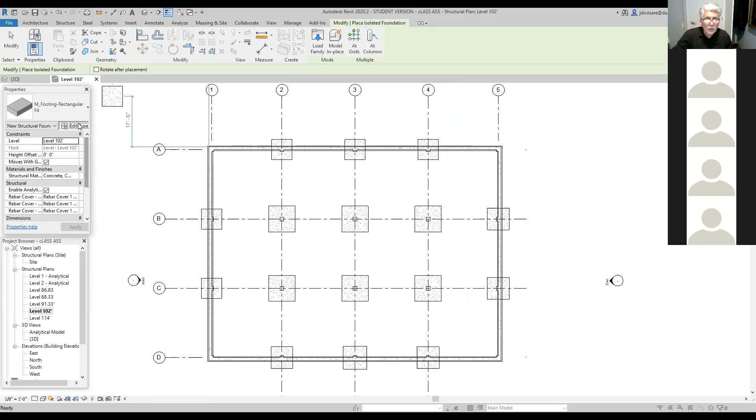Duplicate, this one's going to be F5. F5, 1.6, one foot, 6.5 feet. Columns.

Okay, so how are you guys doing? Having problems? Is it working out?

Sir, could you do one more time with the footing? Which footing, Jimmy? Well, any footing, I just want to know how can I construct a footing. Okay, so I'm going to take one off. First of all, did you create the right type of footing? No.

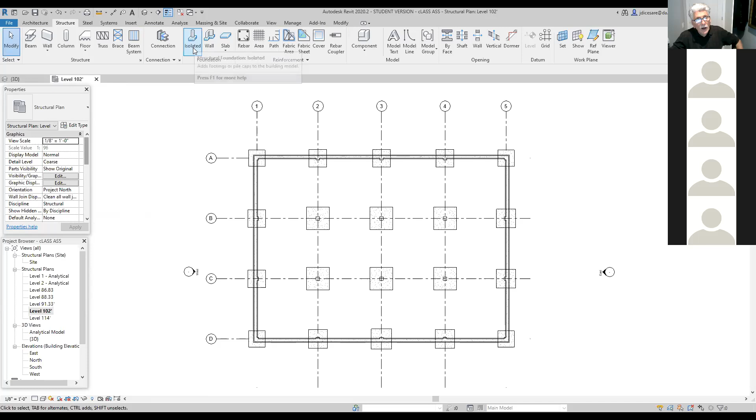Okay, follow the steps here, Jimmy. Are you on the structures tab? Yes. You see isolated footing here underneath isolated? Yep, so click on that. Now do you click on that? Now do you open up and drop down the menu? Okay, you see bearing and retaining wall when you pull down the menu.

Bearing type or retaining type. Do you see that? Wait a second.

It's better that you show me your screen, Jimmy, so this way we can do it on your program. Because like we're playing guessing games here. True. I'm gonna stop sharing mine and I want you to share me yours. Share me your screen, okay? Yep, I'm sharing my screen right now. Stop, let's start over, okay? So now you got all your columns in. Well, share me your screen. What'd you take it off for?

Now I'm gonna ask to be able to request control permission, request, okay?

Sounds good? Okay, so now you can do it either from level 102, you can go down to 91.33. This way, if you do that, there's going to be less mistakes, not mistakes, but less things that are going to show up. So this is the footing underneath columns. You see where I'm pointing? No, I didn't see the mouse moving. Here, this one. Oh, okay.

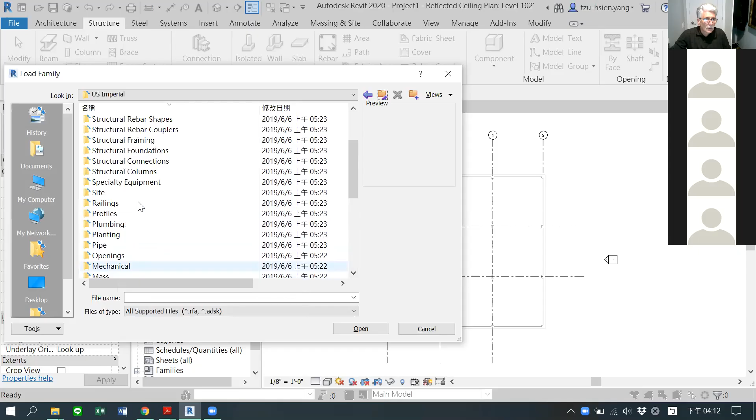Structural foundation, there you go. Okay, footings rectangular, there you go. You see, Jimmy, this is where all your families are. Understand? Okay, double click on that. Now you've got families in your file. You see? Oh, there we go. Okay, now you can go. So that's what I'm saying, you're gonna have to load all your families.

Okay, so now you can go in here and you do edit type. You understand? And I change the thickness, width, and length. Well, first of all, I would just rename this, you'll never use this footing type. If you want to keep it, just duplicate it, right? Oh, okay, and then this you call F1. One of us has to do it, not both of us, okay?

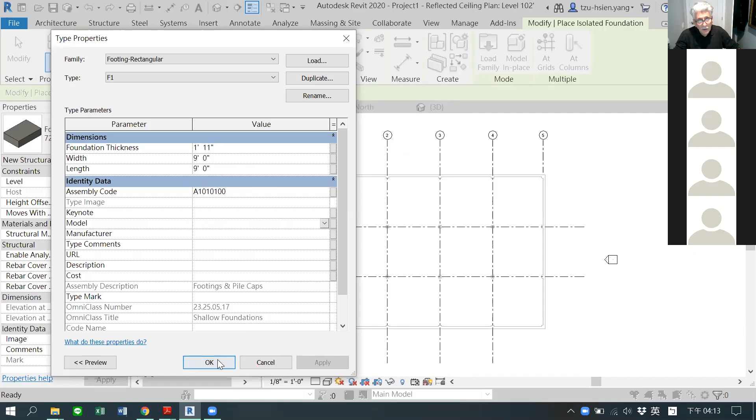Okay, and then this is where you put in the information. F1, 1 foot 11 inches, 9 feet. Here, just put a 9, type in 9, and that's it. Go to the next one, click on the next one. Just 9, there, click outside the box. There, now it's done. So you've got the right. Press OK, then you come here.

Column. You want to install these at the columns, so you click this one, okay? And then you start picking the columns. So I'm going to pick these columns here with the window, and once I'm happy, I press finish. Now they're going to tell you that they're going to move them to the bottom, which makes sense. You say okay, enter, finish, yes, and just escape, okay? And there you go.

There's your footings. So now do that for F2, F3, F4, and F5, but do that at a later time. When you can always come back and do them, understand?

Okay, thank you. Okay, so stop sharing, we're gonna go back.

Now, ladies and gentlemen, I hope you have some paper and a pencil or a pen, because the next thing we're going to be doing is the step footing, and there's about 11 steps to remember, so I want you to write them down, otherwise you'll never remember how to do it. So get yourself some paper, something to write on, and write down the steps somewhere and keep these because you're going to refer to it when you're doing all the other step footings.

So I'm going to go and, okay, those of you that haven't finished putting in the footings, do that as part of your homework this week, okay? Because the only thing we're going to do today is I'm going to show you how to do the step footing, and then I'm going to expect you to do all the step footings for the next class. That's going to be your assignment. I do recommend that you do it because I want you to keep up to speed with the step footing. I'm going to do it once, and I want you to write down the steps. I'm going to do it one more time after that, and then after that I won't do it anymore, and you guys are going to have to do the step footing for the rest of this project, okay?

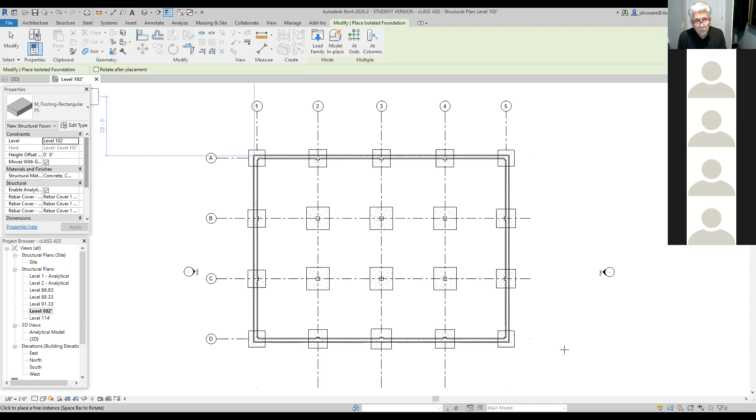So the first thing we're going to do, since we want to create the step footing on axis 1, is figure out which view I should be looking at. Does anybody have any idea?

West view? Yeah, in other words, what view should I be looking at? I want to go create a step footing here. So what view should I be looking at in order to create a step footing there? West. Exactly. I should look at the west view so I can see this whole thing and start drawing in the step footing here. So I should go look at the west view.

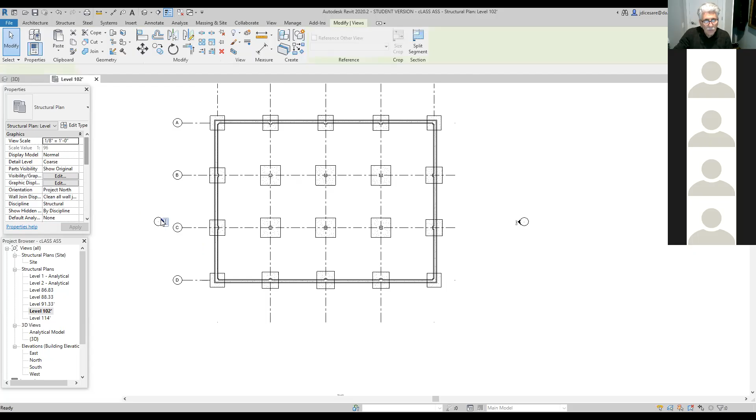So I can either double click here to get to the west view, or I can go to the project browser and click on the west view. Now, if I come here, you'll notice all this is starting to interfere with my model, so I'm going to start pushing it out. And down here it seems a little cluttered, so I'm going to clean this up so I can see the different elevations here.

Just so that it's clear for me what I'm looking at, okay? So I'm just clearing up. And believe it or not, I'll show you how to turn these things off if ever you're doing your drawing, okay? Now, what's happening here, okay?

What I'm looking at right now is the outline of that foundation wall. Does everybody recognize what we're looking at here? This here is the bottom of the foundation wall, right here.

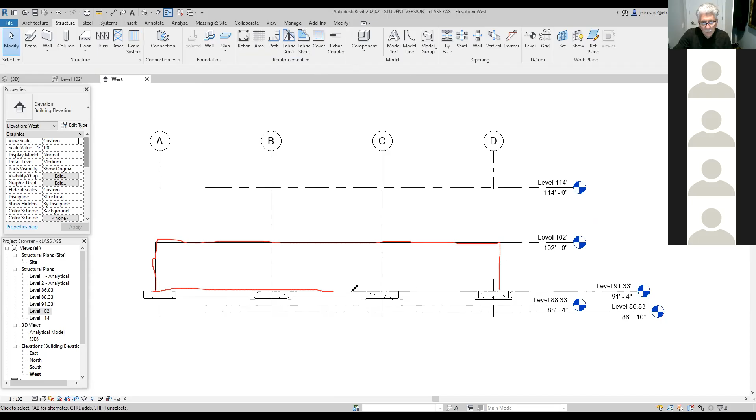This is the footing that's underneath the column on axis A. This is the footing on the column on axis B, C, and so on. The reason you see this one is that it's the footing on the inside of the building, and it's all being projected in the elevation. This is the footing that's on the inside of the footing.

These are the 3 footings that I see along axis D, that's why I see 3 lines here. So everything that would be in elevation gets projected into the view, okay? And of course, this line here is the little strip footing that we have placed underneath the wall.

So this is what you should be able to relate to. And of course, these are the levels that we created. The top of the wall here is at level 102. The bottom of the wall here is at level 91.33. Here, this footing measures 1 foot.

And these are exactly the footings that you created. So for example, this should be footing type F5. This is F5, and the one behind it should be F3. In other words, this is footing F3 back here on axis D, and this should be footing F2, and that's why I see it, because it's all being projected onto the view of the elevation. So, okay, let me just...

So now what's going to happen is I want to create a step footing in this wall here, okay? And what I have to do, so first thing, guys, write these steps down because I'm not going to repeat them 100 times, write these steps down. Okay, so what you're going to do is, well, let me get out of this here first.

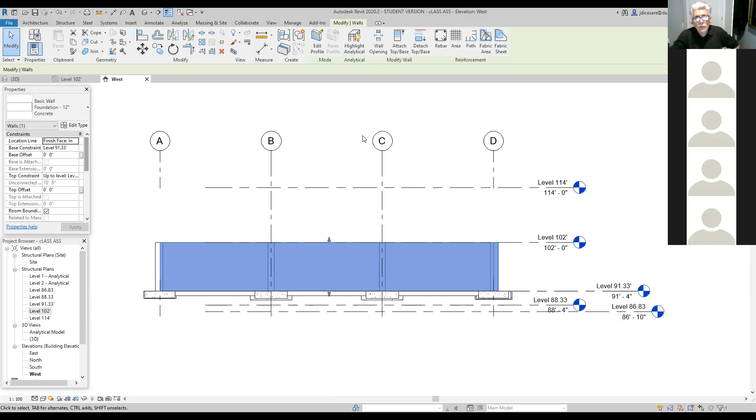Is that what you guys have? Is everybody okay? So I pick the wall here and I'm on Modify Wall. Does everybody have that? Yeah. Okay, I want to hear yes from everybody. Yes, okay, great. Now what we're going to do is split this wall.

So we're going to go here, and this is the split element right there where I'm pointing at. So I'm going to take this and pick this, okay. Save project, of course, okay.

Now what I'm going to do is zoom in a bit, okay. Now you'll notice that it starts here and I'm going to move along here, okay. Now, where do I want to split this wall? Well, it's not that critical where I split it because the step footing doesn't have an exact location, it has an approximate location.

So I want to make sure that I split it so it doesn't interfere with the other walls. So I will put it at about, let's say I would put it here at about, okay, I'm going to split the wall about there. So like here I have 19 feet.

I don't know if you guys have the same thing. The program has different ways from where it takes its reference point. And I'm going to split it, split it at 19 feet. Oops, 18, 19. So now that wall has been split. In other words, this becomes one wall and that becomes another wall.

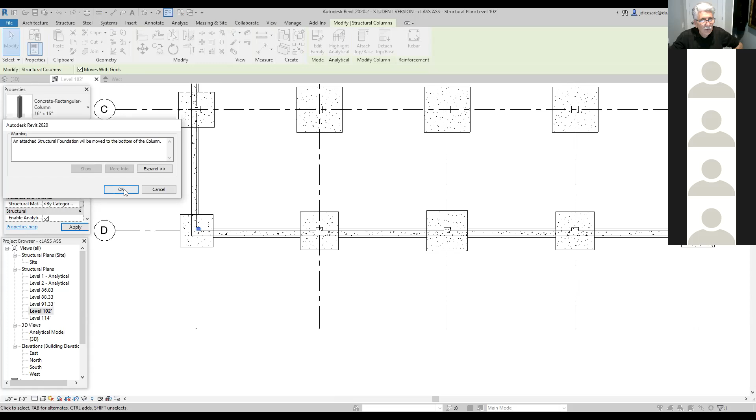I'm going to go to the column here, pick the column. You see where it says base level 91.33 in the properties palette, I'm simply going to change that to elevation 88.33. I'll say apply, and of course it's going to tell me it's also going to move the footing. Press OK. Now, all of a sudden, that footing has been moved down to that level.

I'm going to go back to the west elevation, and you're going to see what happened. You see that footing is no longer there, it's exactly where it's supposed to be. So that's how I modified that. You see, with this program, you modify the information, it modifies the model, and that's why the information is key when it comes to Revit.

So now I've got that footing at the right elevation. Now what I'm going to do is go to the first element here, and I want to make it 1 foot lower. Now, I can either drag this down by 1 foot.

Or what I can do is go to the properties and say here, base offset. Since I want it to go down, it's a negative value. I'm simply going to say -1, and apply, and it's moved down by 1 foot.

Then I'm going to go pick the other element here and do the same thing. I'll go to the properties and say offset. Well, now I want it to go down 2 feet. -2, apply, and now it's down 2 feet.

Now this one here should be all the way down by 3 feet. So I can either do the offset again, or better yet, when I look at the base constraint, I can do 2 things: I could put -3 feet here, or I can simply change this to 88.33, apply. I'm going to get the same results.

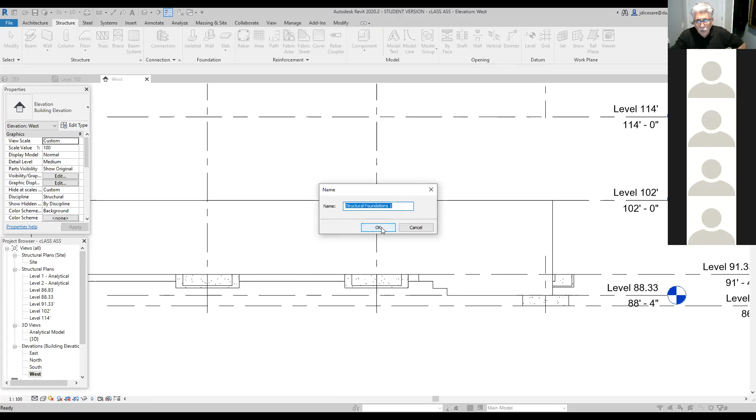Now once you've done that, what you need to do is you have to tell the computer what plane am I going to use in your model so I can do all the calculations. So what you're going to do is you're going to go and set a plane that the computer can use to do its calculation.

So up here you have set work plane, so you click that. And then on the screen, you're going to pick which plane that you want to work with. So I'm going to press pick a plane, okay. And right now I'm going to be picking the wall. So the wall is a plane, and I'm going to tell the computer, do all your calculations from this plane. So now it's picked, the computer now stored that the wall plane is going to be where it's going to be doing all its calculations and so on. So that's what the computer wants to know.

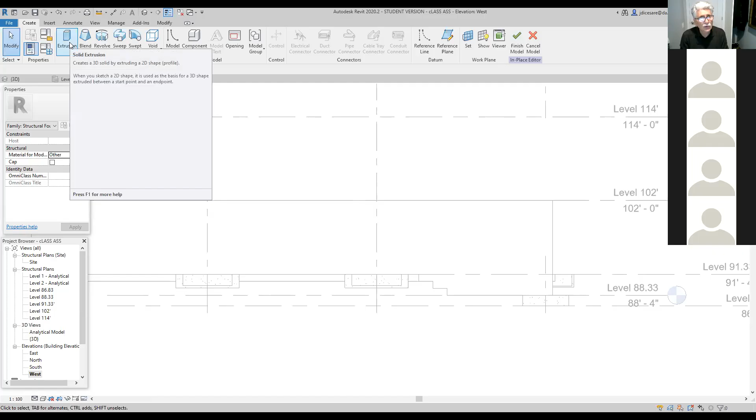After that, what I'm going to do is I'm going to create an extrusion. So therefore, I'm going to come here at the left-hand side, and you see solid extrusion. So if everybody's there, you simply click on the icon. Now all of a sudden you have some drawing tools. So what they want you to do is draw the outline of the extrusion, so the program can actually extrude your step footing.

So I'm going to be using this here, the line segment, okay, and I'm going to start drawing. So for example, I'm going to zoom in a bit, okay. In other words, my step footing starts here, right? And then it goes to the first part here, then it goes down to here, and I just draw the outline of where my step footing is going to be.

I'm going to go all the way to this footing here. I'm going to go down a foot. Now here I know that I have 10 feet, so I'm going to move over to 11 feet 9 inches. I'm going to go up a foot. I'm going to go over 2 feet. I'm going to go up a foot. I'm going to go over 2 feet.

So I'm just drawing the profile of what the step footing is supposed to look like. I'm going to go over to 1 foot, go over to this here, and close. So now I've told the program the profile of my step footing.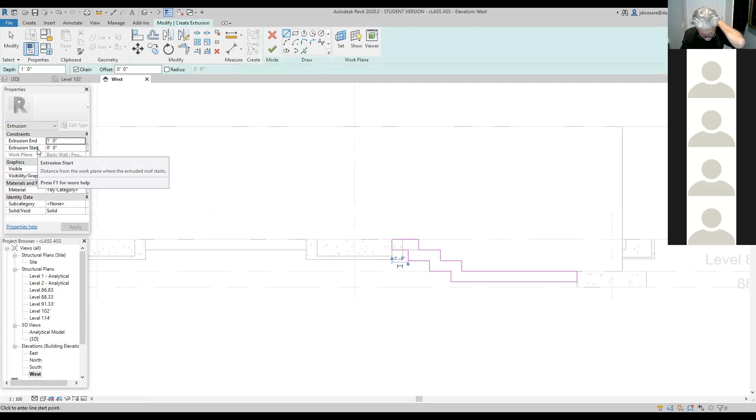So you know that footing is 4 inches on this side of the wall, and 1 foot 4 inches on the other side of that plane, because the footing is 1 foot 8 inches total. So where does the extrusion end? How much do you want it to come out of this plane? Here I'm going to put 4 inches.

So I want it to end towards me, a positive value, coming towards me along the axis 4 inches. And from the plane I picked, I want it to go another foot 4 inches so I can have a total of 1 foot 8 inches. It's going to start in the back of the wall at minus 1 foot 4 inches, 1 foot 4 inches from that wall.

So I'm going to put minus 1 foot, minus 1 foot 4 inches, okay? I'm going to press apply.

So now you're almost done. Basically you've told the program: start from here, come out 4, go over another 1 foot 4, have a total of 1 foot 8 inches. If you're happy, good - if you make a mistake, you can delete or modify.

Now you just press the check mark. And if you're happy with what you see, you press finish model and you're done. Now you don't see much, but if you go to your 3D view, there's your step footing.

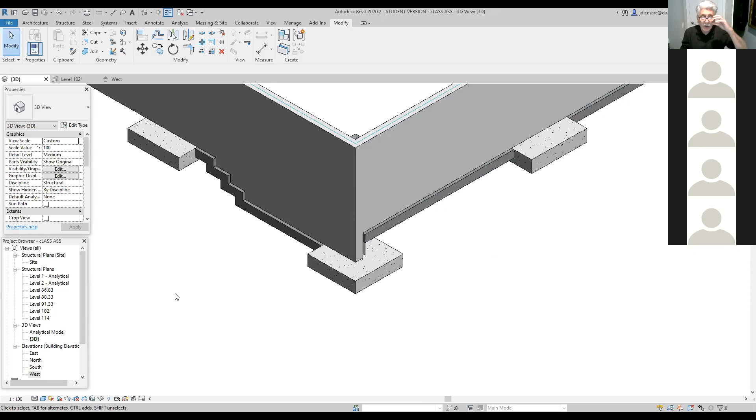Okay, and then after that, before I go back, I'm going to do something else. Let me go back to the west elevation. Now remember here I no longer have a footing - I deleted it because I deleted the whole footing. And here I no longer have a footing.

So what I should do is put a footing in here, and I will model that footing. Instead of going through everything again, I'm going to actually model that footing in there using the same steps. The only difference is I won't have to split the wall or move things down, because the footing is going right underneath here. So I'm going to repeat this.

So to put this footing back in, I will go back to structures. I don't have to select an element this time because I'm putting my footing right in here. I'm going to go to component again and follow the same steps as when I created my step footing - model in place. Again, I'm doing a footing, so I'm going to categorize this under foundation structural footings.

Okay, and it should be number 2, which is okay with me.

Now I am going to pick a working plane. I will set my working plane here. I'll pick one, and of course I will pick the wall, because this way I won't have to change much in the properties palette.

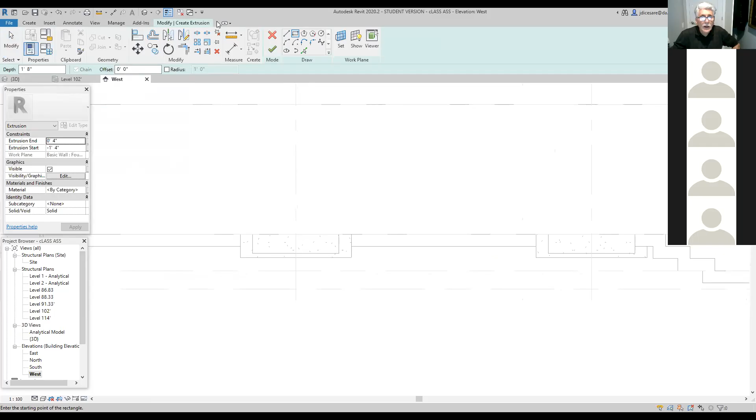I'm on modify. Okay, hold on, I'm going to cancel this, because every time I cancel I have to go back. Cancel.

Yes, okay, so you're on the structures tab. Okay, yep, model in place. Exactly, this is all done, right? Yeah, everything up to there is fine.

Just that after I choose the working plane, it says Revit cannot make this plane visible because it is not set. Oh. And then when I do click it, I don't have the extrude option, it doesn't pop up in my ribbon up on the top.

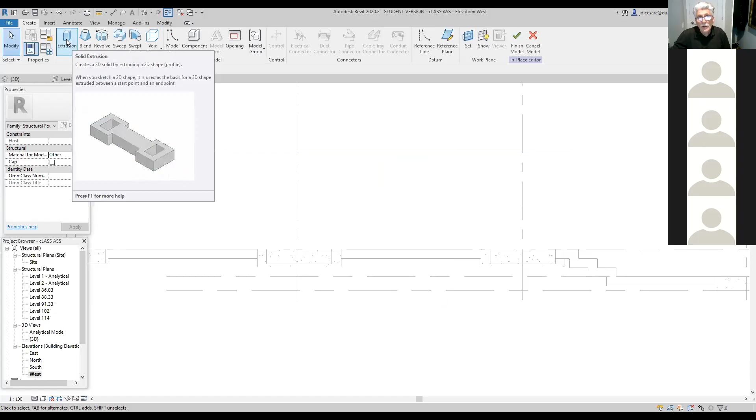So you don't have this in your program? Oh yeah, okay, I got it now. Sorry, I don't know why it wasn't popping up before. Because if you don't do the model in place and make your plane, it will not pop up. This is why you have to follow the steps, because if you don't, the menus will not pop up to be able to do the next step. If you didn't pick a working plane, that would never pop up.

No, I don't know why I was doing the exact same thing before, but it wasn't showing me extrude. Okay, but now you got it, so now you click here. Pick a working plane, okay, so here. Cancel. I'm gonna have to start all over.

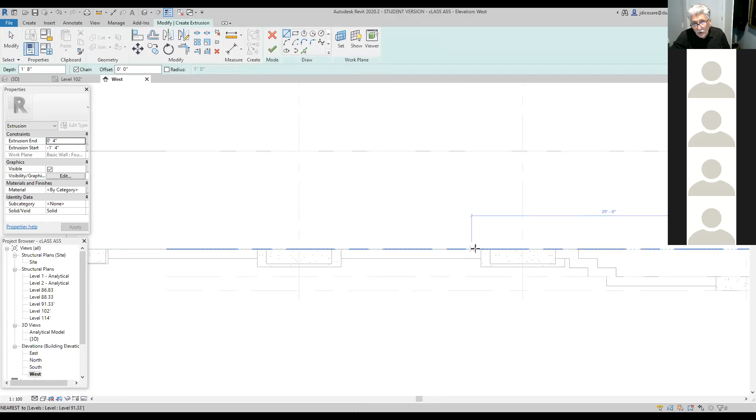Structures, components, model in place, structural foundations, okay. Set a working plane, pick one, okay. Good, extrude. Now, since you're gonna be drawing a simple rectangle in here, what I recommend is you take this drawing tool, or you can draw each line segment. It's as you wish, so you can take this one or this one. I like to use that one. And you go from here and down to there.

And of course, now I've drawn the profile of my extrusion. I press the green thing, and if I like it... nope, I drew it to the wrong side. I should have drawn it to this footing here. So I'm simply going to stretch it to there. You see, I can make modifications before I stretch it to there. It should go to that footing there. I made a mistake before. Everything looks good, sounds good. Press finish.

And because I've used the same plane, I don't have to worry about the extrusions. If I go look at my 3D view, now my footing is in there again. So now, guys, you do the same thing and put this footing in, to see if you got it right. So there is my footing. Try it on your own, that's the only way you're going to learn how to use the program.

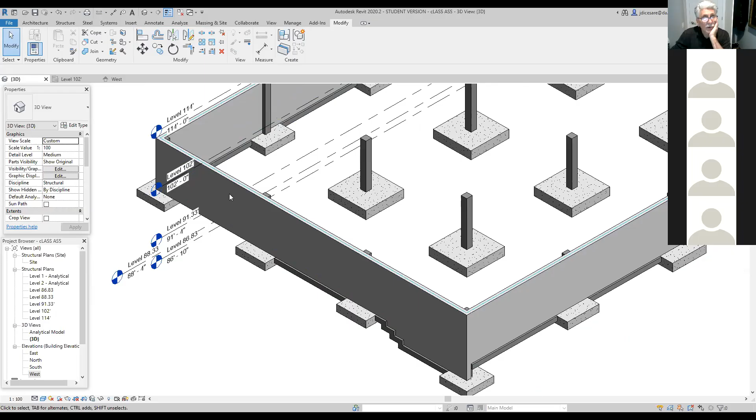So for that, you don't have to split the wall or anything, we will simply... okay, so basically I'm going to go back. I'm going to do it myself, but I'm going to expect you guys to try it, on the west side. So let's go back.

Structures, model in place, structural foundations, okay. Set a working plane, pick one, okay. Wall, extrusion, there. No, I took the wrong tool. Okay, it looks good, finished. Let's see, yeah, that's good. Go look at it in 3D. There we go, so everything's good.

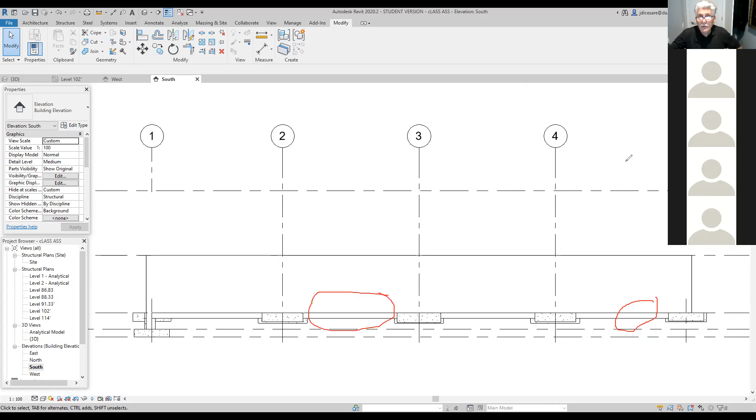I'm gonna clear the drawing. And now, would everybody go to the south wall or the south elevation? In other words, go to your view browser and click on south and make sure you have 1, 2, 3 here. Is everybody there? So that we can repeat the step footing one more time.

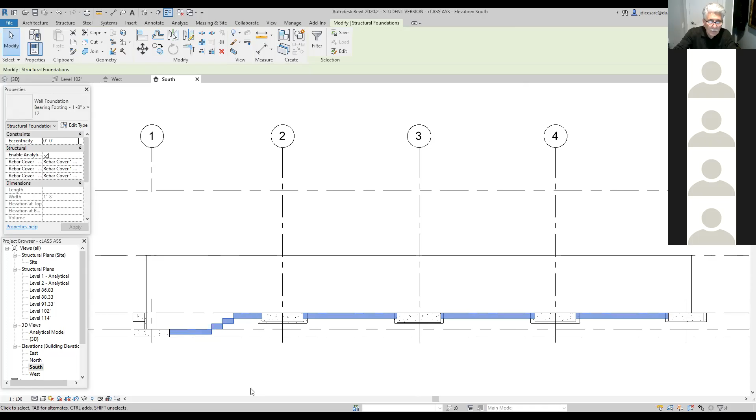So now I've stepped down my wall. I will hold the control button, take all the strip footings that I created here, and I'll be deleting them - and they're gone. Now, the reason why you still see this one is that this is the footing on the north wall, and that's why it's still there.

Okay, so once I've done that and deleted my footing, I go to the Structure tab and tell the program that I want to do a modeling in place. Of course, they want to know where I'm going to store this model, and I like to store it under the structural foundations. Now I'm up to 4 because I've created 1, 2, 3 on the west wall. Press OK.

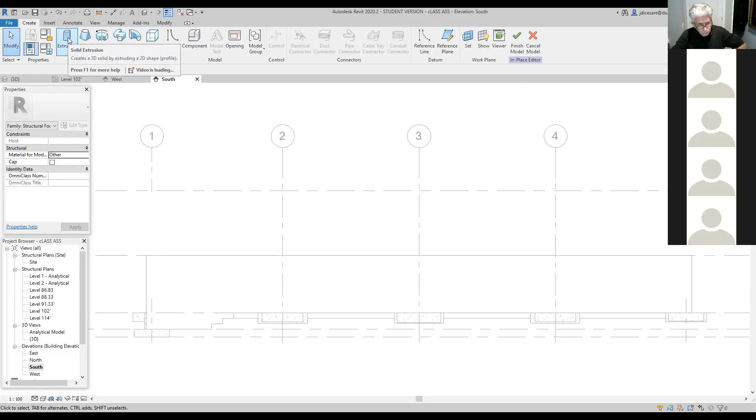Once I've done that, I've got to tell the program where the working plane is that it needs for its calculation. So I'm going to set a working plane, and I'm going to pick the wall. If I ever go back to set the working plane, you'll see it say foundation wall, and that's the correct one. Once I pick my working plane, I tell the program I want to extrude something - I'll go to the extrude command, extrusion.

Okay, now I'm going to zoom in so I can be a little closer, and I am going to start drawing the profile of my extrusion. If you know what an extrusion is, you force things through a profile and extrude a piece - that's why they use the word extrusion. So my step footing starts from there, goes there, goes there, goes there, goes there, goes there, up to this footing here.

I've created too many steps, right? Guys... I think you're good, sir. Well, the problem is when I come back here...

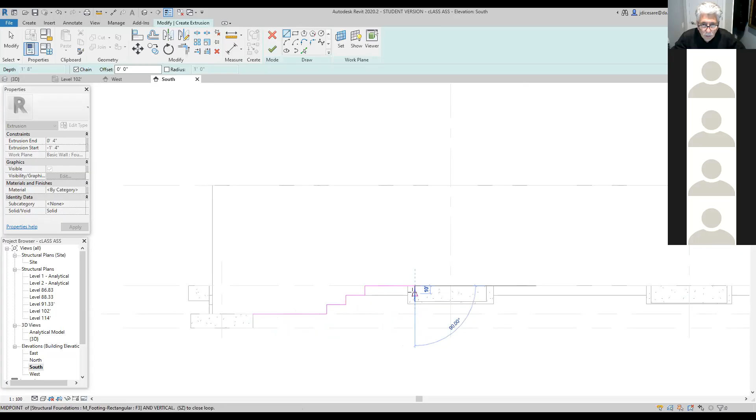I have to go down to 1 foot here, go back a foot. So I have 5, 3, I'm going to go back to 4, 3. Go down 1 foot, go over 2 feet. So guys, you just have to be patient. 2 feet, go down to 1 foot, and go down here and go back to... anyways. And of course, go down to 1 foot, go here, and go up. So now I've basically drawn the profile.

So therefore, if I'm happy with it, guys, don't be afraid. If you made a mistake, you can erase something. As long as you don't press this check mark here, you can keep on drawing and going back and make any type of corrections. So that's good.

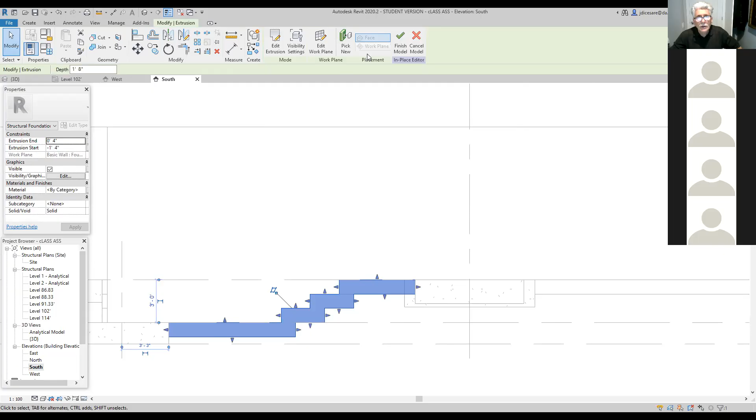Now, if that's the extrusion that I want, yes, then I go into the properties palette. Like I said, the program will always keep the last values. If you see right here, the program will always keep the last values that you put in. And since I've used the wall as my reference, my working plane, I don't have to change these now because they all have the same value. So therefore, that's okay. And if I'm happy with everything, well, I simply press finish and it should be done.

And if I go look at it in 3D, there is a step footing on that side. Looks pretty decent.

And that's it. So guys, what you need to do for next week is, of course, go and create the step footing in here, because there is a step footing between axes 2 and 3. Oh yeah, I was going to show you what to do. So go to level 102, okay? Now, if I look at these two footings here, they should be all the way down to elevation 89.33, because if I look at section EE on my drawing, that's where the level of those two footings are.

So what I'm going to do is I'm going to pick this column here. I'm going to hold down the control button and pick this column here, so I'm going to pick those two instances, because that's what they call them in Revit. And I'm going to go here and look at the base offset. Right now, the base level is 91.33, but I want it to go down to 89.33. So I'm going to make the offset minus 2 feet. I'm going to put a value of minus 2, apply.

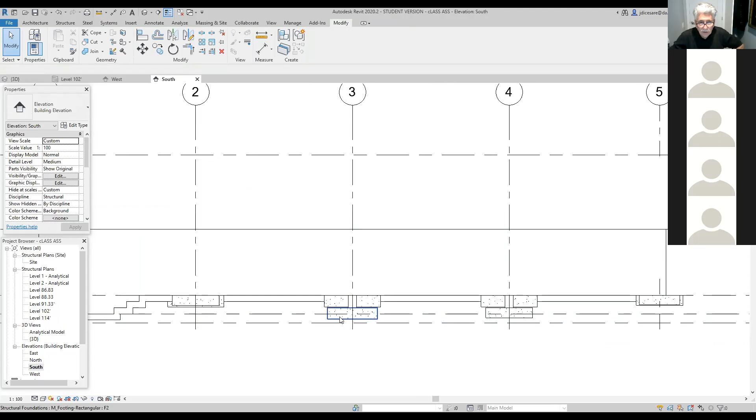Yes, of course, I want you to move the columns. And now what happens is that if I go back to the south elevation, now those two footings are exactly where they're supposed to be. Now what you see here are the footings inside the building - these are the footings that are on axis D, and now they're at the right elevation. So when you make your step footing, you're going to go down to this footing, then you're going to be putting a footing in here, and another footing in here, and then you're going to be creating the step footing in here, okay? So, any questions?

So, I hope you guys find Revit a very complicated program, because it is. It's a very frustrating program because it is. There's a lot of stuff, and this is your first time at it, so don't get totally lost. I mean, with time, we will practice and it will become like anything else.

So what I'd like you to do for next week is put in the step footing in here, and then finish modeling the footing in here. And I'm going to, by next week, also have that step footing modeled in, and also have that footing modeled in, and then we're going to take it from there.

So are you guys pretty well saturated for a day? So what I'm going to do is stop. Wait, do we have an assignment for next week or no? Well, yeah, I want you to do those step footings. Oh, okay, cool. I'm just going to pause this just in case, okay?